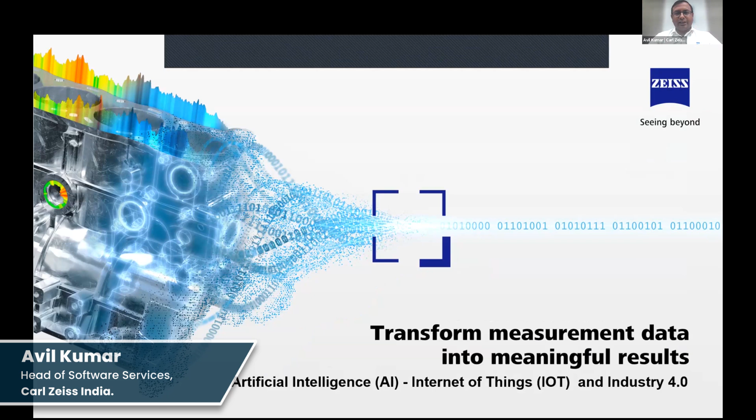I will take you through how Zeiss, with respect to AI and IoT, is contributing to the manufacturing industry. Just look into one of the videos here.

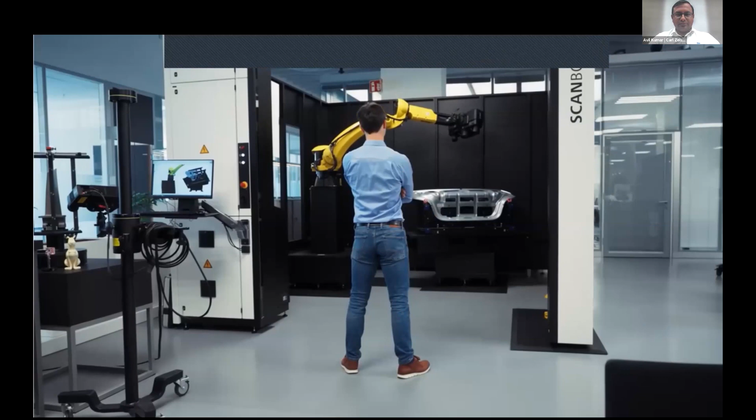If I had one wish, then I would wish more wishes, because AI is a technology that can be used in so many application fields to get us into a better future. I am Alex, and I want to make our world each and every day a bit better. And I'm truly convinced that our way for doing this, and my personal way, is using artificial intelligence. Artificial intelligence is at the core of my personal work, because Zeiss is building and producing machines for many different market segments that produce large amounts of data. Machines for markets like medical healthcare, semiconductor industries, industrial quality solutions. And these machines produce such high quality data at such an enormous scale and speed that no one would ever be able to analyze all of this data. So the only way that we have, as humanity, as society, to make use of this data is to have a technology that translates these huge data piles into something meaningful, into the hidden information. And this is exactly where artificial intelligence can be the key enabler.

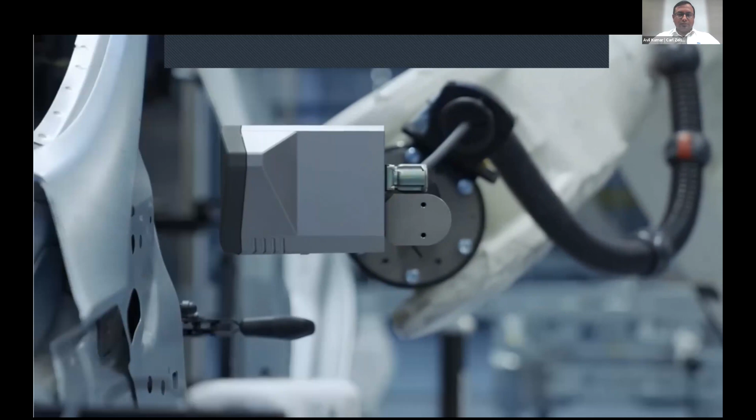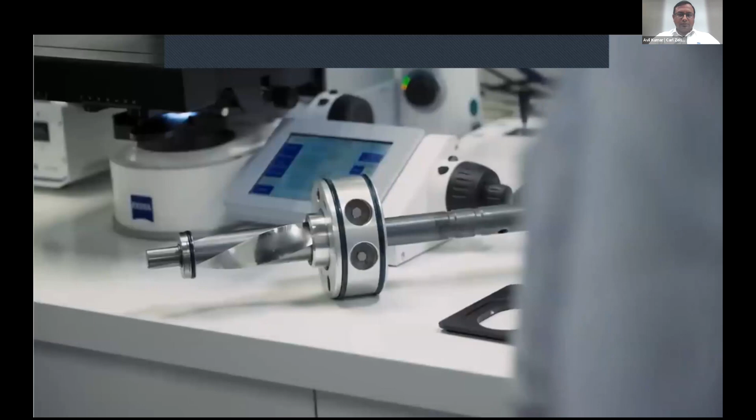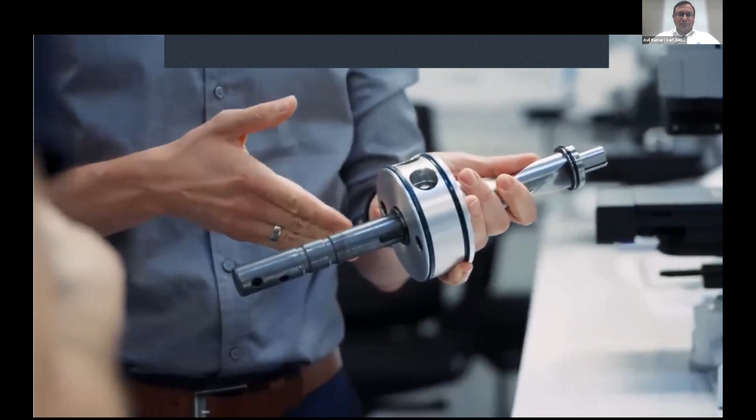Industry 4.0 is about lifting our industrial processes, our manufacturing processes, to the next level by connecting each and every single step that a product went through, from idea over being manufactured until being used. And one key technology in this process is artificial intelligence, because artificial intelligence allows us to ensure that each machine does what it is supposed to do. We can train algorithmic solutions to find defects in each manufacturing step reliably, efficiently, reproducibly, and when we integrate artificial intelligence into each manufacturing step, we will end up with products that are error-free, that are produced more efficiently, and that ultimately serve all of us in the way they have been designed to.

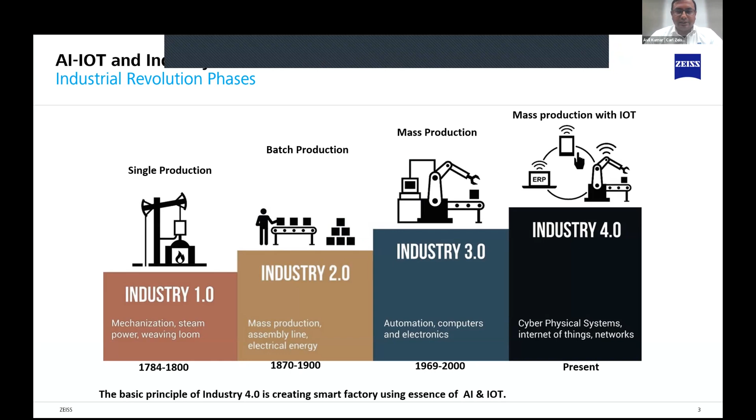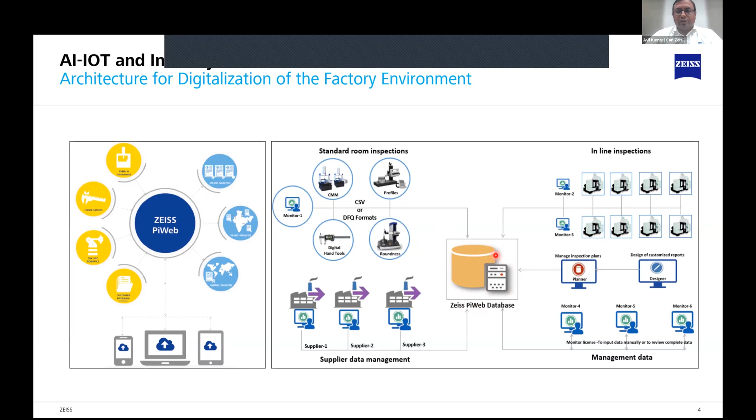The architecture of digitization involves pulling data into one particular place, whether from the factory environment, the standards rooms, different equipment, or machines. Then comes suppliers' information, how the suppliers' data can be brought into a particular place. And when we look at inline inspections, how we can bring data from the machine lines. All this information comes together into a particular dataset and delivers notifications or reports with the help of digitalization.

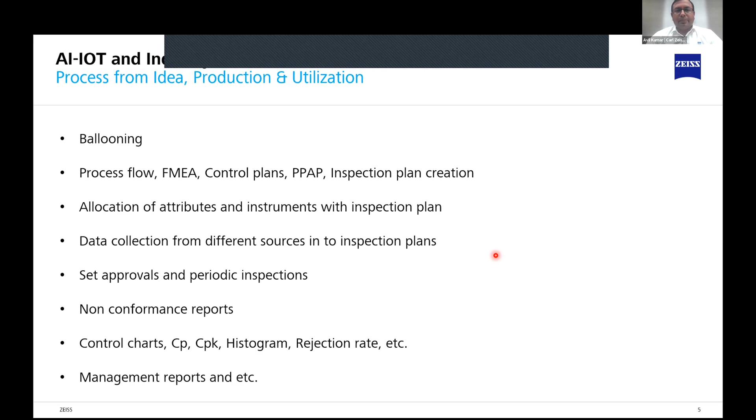Once all this data is there, notifications of non-conformance and reports can be generated, and with this data, decisions will be taken. These reports enable the management or the user to make a decision. That is how the whole solution works.

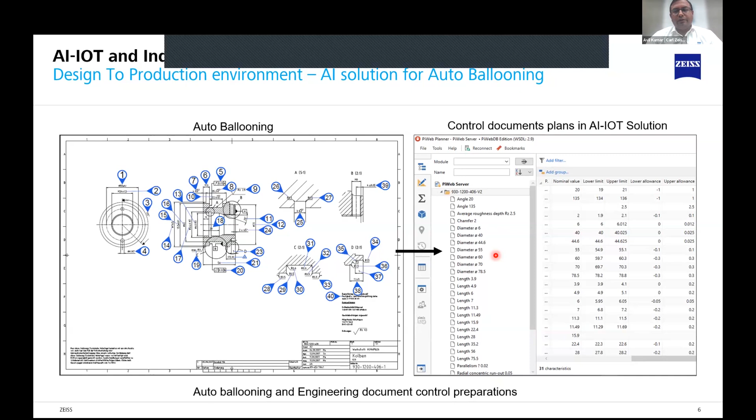As an example, if a drawing is there with particular dimensions and tolerances, with intelligence built into the software or process, we can bring all this information where the designer has put his thoughts into making a product, and push it to production. This is one process where we build intelligence to bring all this information through auto ballooning, directly into a solution that generates all the required engineering documents in specific formats.

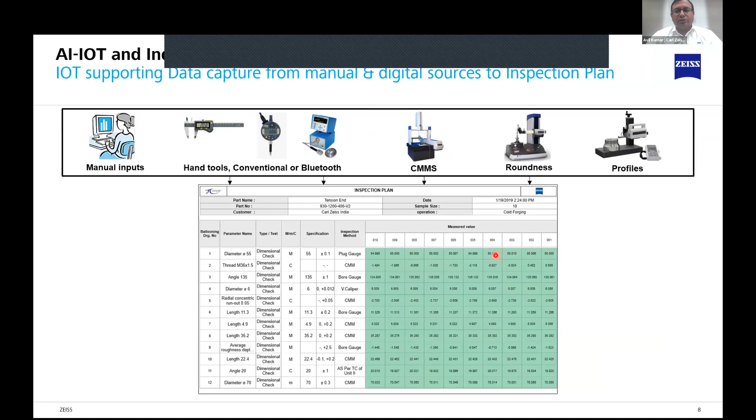Once the templates and data from design to engineering documents are done, the data can be brought into this particular matrix, whether from any machines, instruments, or manual inputs. All these things have to be brought into a defined matrix to take a decision, enabled by collection of data from different sources and instruments. Once the data is there, we have standard tools for the experiences of the process, how it's able to perform, how the trend is going, and we can do analytics with all the standard statistical tools.

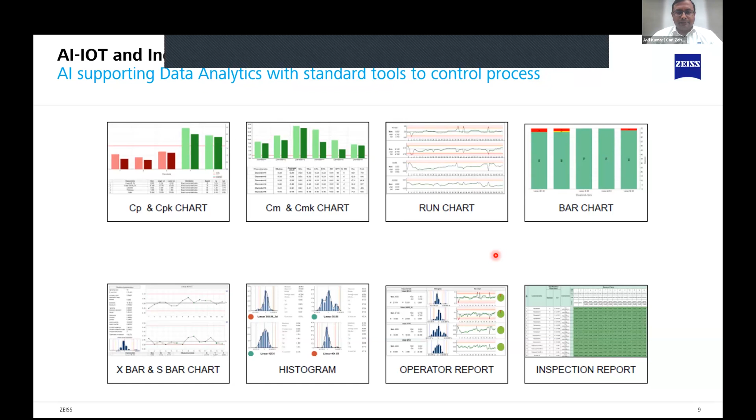As we have seen, the life cycle of a product has become very shortened. Earlier, one car design used to run for at least 10 to 15 years, but now in the industry, each manufacturing OEM is trying to bring new cars every year. So the requirement from the customers and the market gets generated in the design phase and is then transferred to the manufacturing industry. It is very quick - within 1.5 years the entire life cycle of the product is changing.

How can this be handled in the shop floor environment? As Kundan sir told, our manufacturing industry in India needs to be enabled, especially from the shop floor base. This is one piece of information where we can bring together all the design aspects and manufacturing data, and showcase it in a realistic way to understand how the process is performing and what decisions and corrections need to be taken.

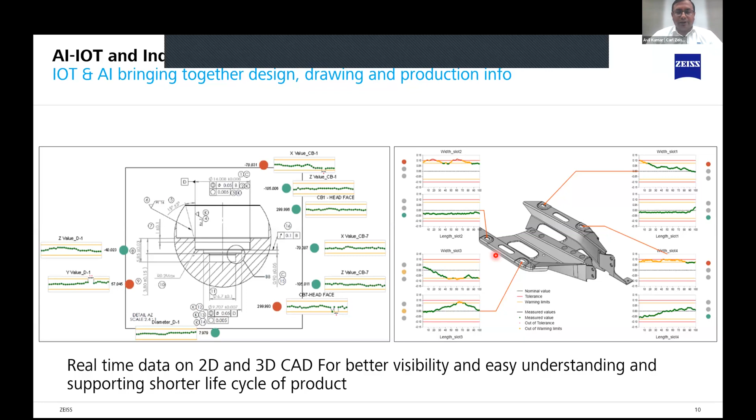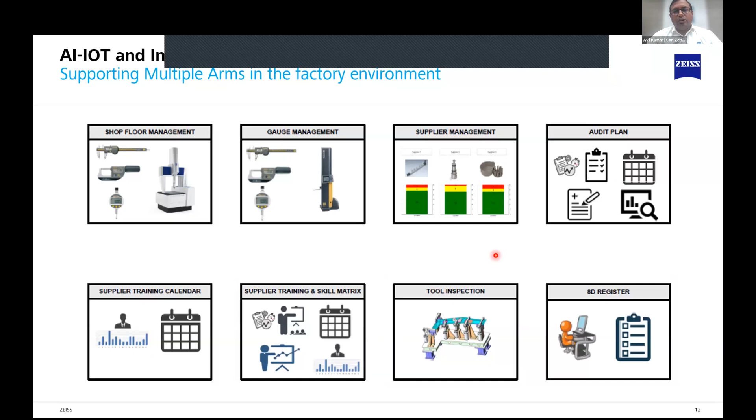This is one example of how non-conformance reports are generated. But not only non-conformance reports, there are multiple arms in a factory environment - it may be shop floor management, gauge management, or outside the factory environment like supplier management, whether audit plannings or supplier trainings, or tool inspections. All these things can be modularized and integrated with IoT to see how the industries can be connected.

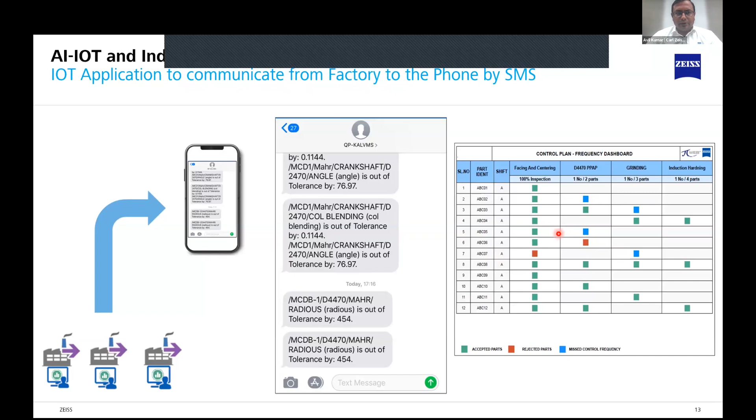One application is where communication from the factory environment to the user or decision maker can be transferred via SMS with respect to requirements. If you see the control plan requirements, how the frequencies, whether it has been done, where, and all the deviations are there - that information can be transferred through a solution. So some of the few success stories we can showcase here are from powertrain, car body and mold industries, and aerospace.

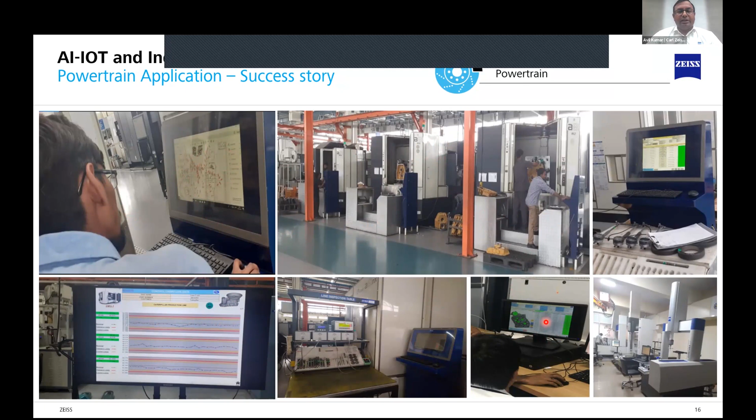With respect to powertrain, we can see IoT functioning in a real Indian environment. Here there is only one place with one solution at a manufacturing area, where all the documents have been brought into the solution. Once the operator is working with only the solution with the IoT, this is enabled to the customer, and the final acceptance of the part is decided by the customer who is sitting at any geographical area.

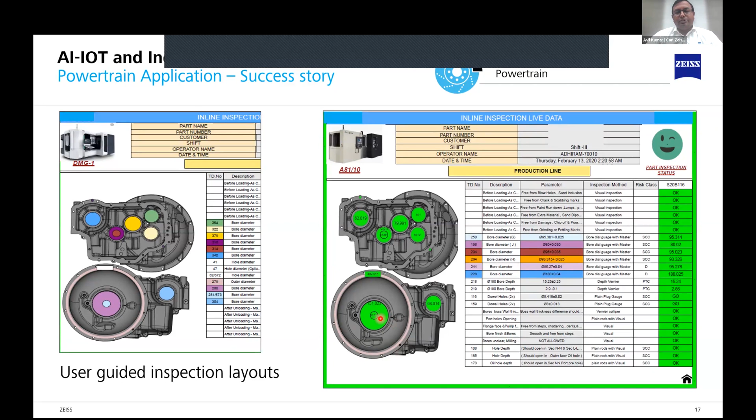One example, as we have seen earlier, is user-guided inspection layouts. Here the user will be able to understand the change in the product life cycle - once you see the physical product and all its requirements, all the inspection data can be brought into a particular matrix where it is easily visible. For a particular diameter, once the dimension is measured, it's easy to say if it's green it's within tolerance, and if it's red it has some deviation, so the operator needs to take decisions, or the software will communicate to the machine what deviations need to be taken care of.

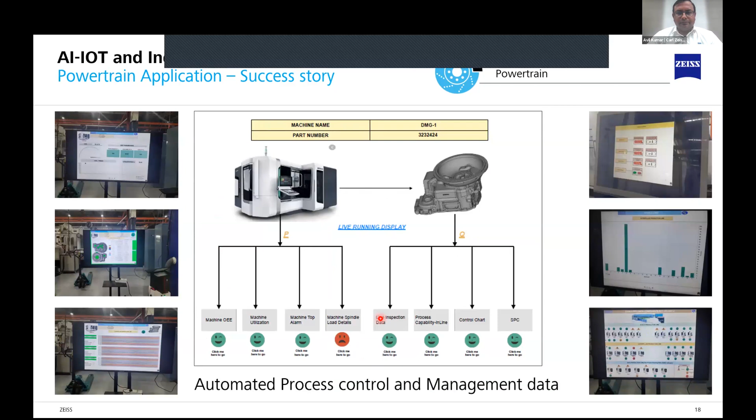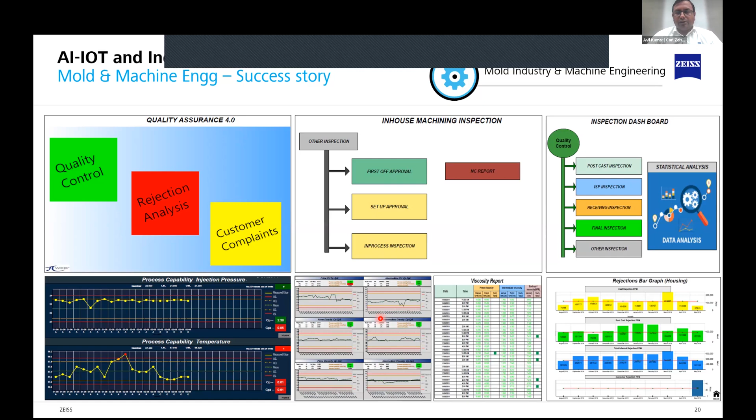Automated process control - as we have seen from the earlier information, the whole cycle is being controlled by the solutions. In the mold industry especially, we can see a lot of requirements which can be brought into these particular solutions, where we can provide what the customer needs.

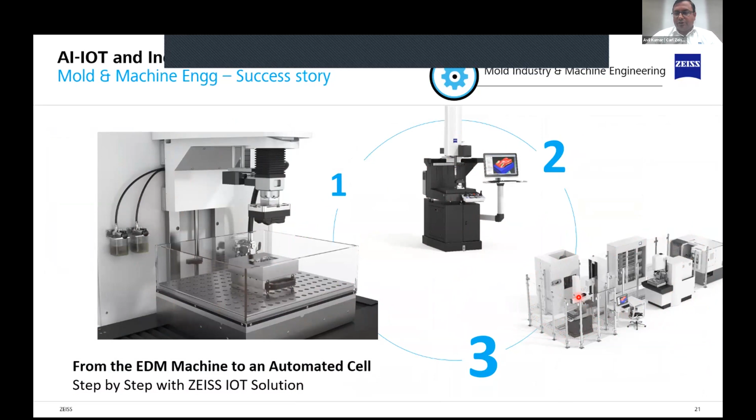One example is from EDM solutions, where we can also work independently without any solutions. Once this inspection EDM part is manufactured, we can also work with the CMM, and the other option is working in an automated cell, where it will have communication with the machine, the measuring software, and all the tool grips. So one is standalone, second is semi-automated, and third is fully automated production, where we can see a cell with a robot also.

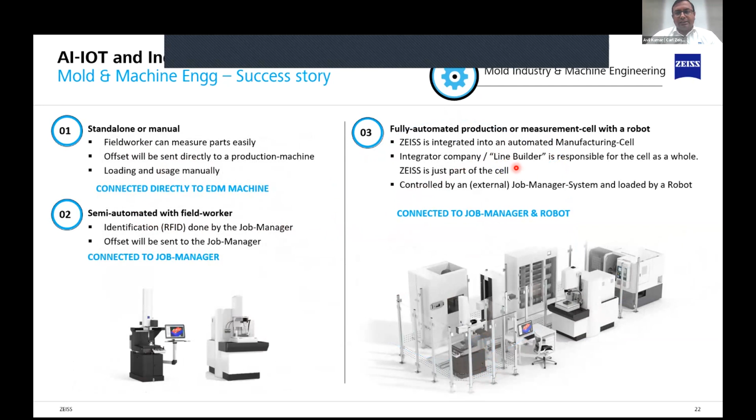These are the advantages of how connected systems will be integrated - we can see all the equipment connected to each other, resulting in a reduction in time and an increase in production.

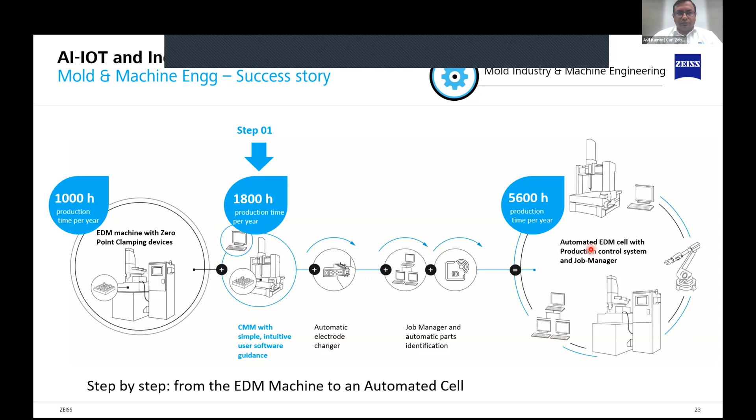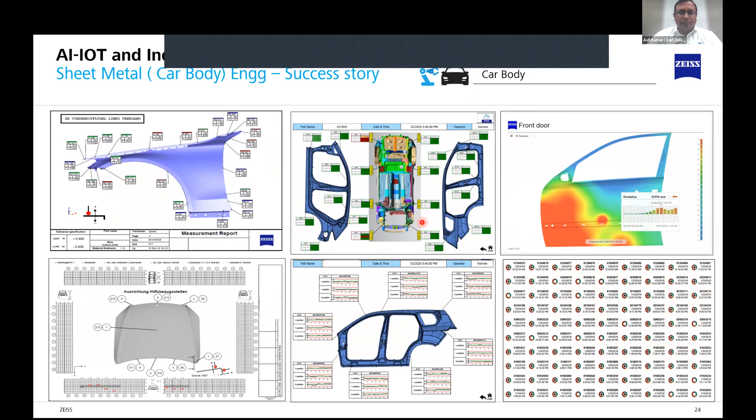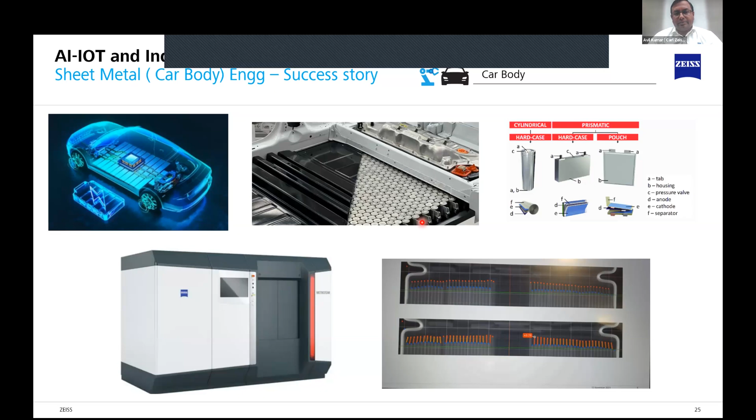There are many points or fields where AI is being incorporated in measurement or metrology. One of the recent applications of AI and machine learning is in the analytics of EV cells. This is an area more talked about in the market now, where we see a lot of AI and machine learning being brought into this particular segment.

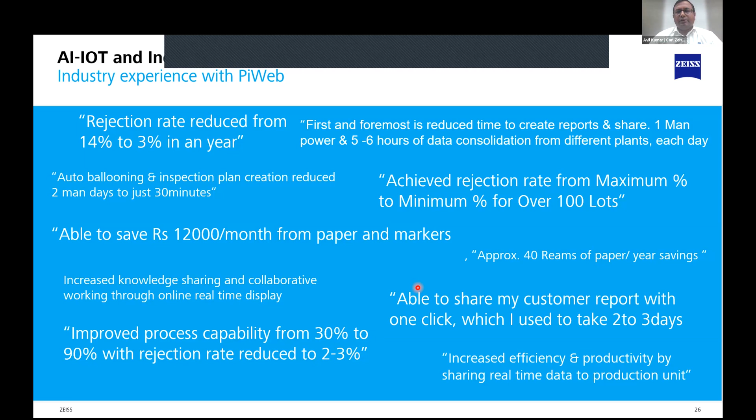Some information on industry experience: rejection rate has been reduced, able to save some amount, save some paper, able to forecast a few rejections which can be avoided, and improved process capability from 30% to 90%. These are a few industry experiences with the solution from Zeiss.